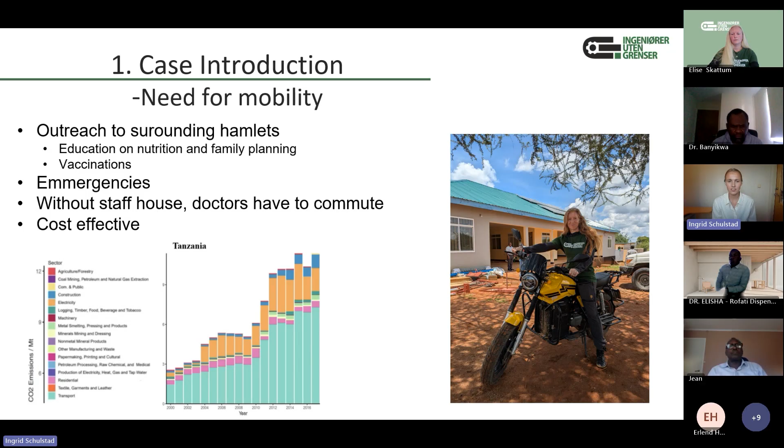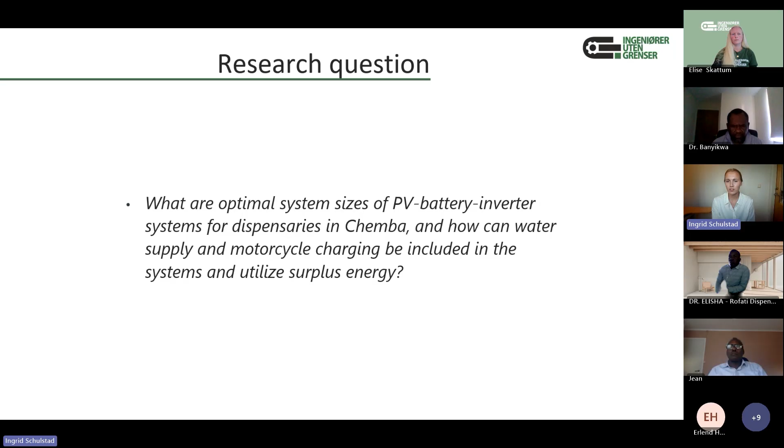So my research question ended up to be: what are optimal system sizes of PV battery inverter systems for dispensaries in Chemba, and how can water supply and motorcycle charging be included in the systems and utilize surplus energy?

Bear with me, this is the overview of my method, and I'll take you through the fieldwork, followed by the load profiles. I made 3 load profiles based on the fieldwork, all made up of critical load, normal dispensary load, scenario-specific load, and dispensary motorcycle load.

I've also modeled the PV generation at the site. These 3 load profiles are included in a MILP, mixed integer linear programming optimization model, to find what are the optimal system sizes, how many PV modules and how many batteries you should have.

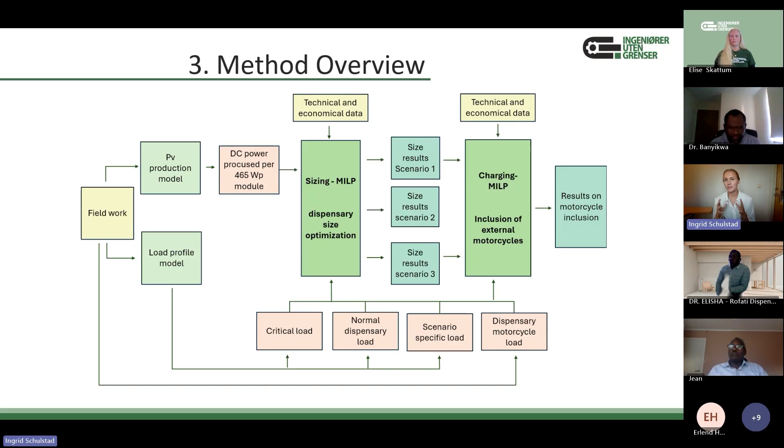After the sizes are found, I made a new model for charging optimization, where I investigated how external motorcycles or village motorcycles can utilize the surplus energy in the already optimized system sizes, and in that way, how the dispensary can act as a rural charging station.

So first, the fieldwork. We started in Dar es Salaam, where we met Eliko at their office and spent some time with them and got to know them. We also spent 2 days at the University of Dar es Salaam.

We did interviews with doctors and nurses at 5 different dispensaries and 1 health center, and with the district medical officer, who is responsible for all the dispensaries and health centers in Chemba district.

So this was very valuable for hands-on and local information about the local needs.

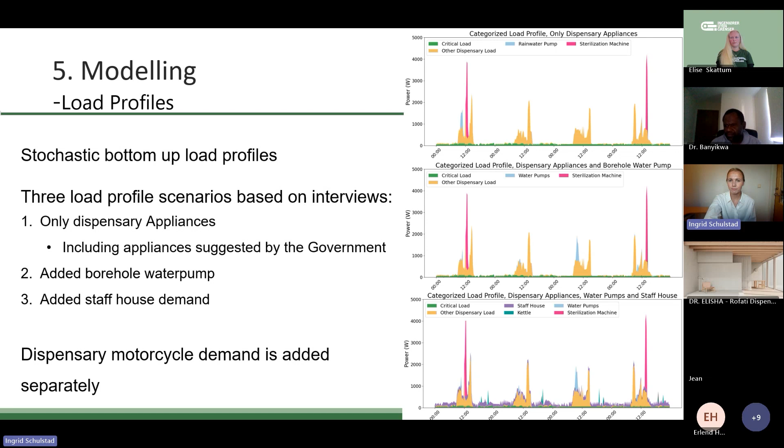And the motorcycle, the dispensary motorcycle demand, is added separately to these load profiles, and they're represented here.

Here you can see this upper picture is a representation of the case where the doctor commutes back and forth to the job every day, and here there's a meeting and outreach for these small areas only. And this is the case where the doctor does not commute.

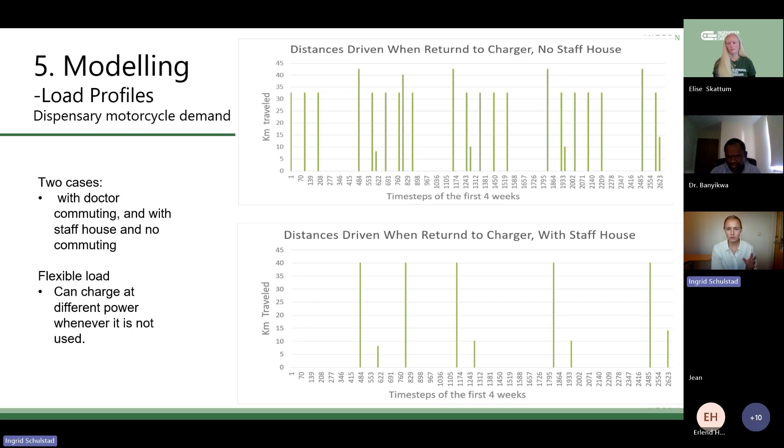This load is a flexible load, which is very preferable because you can charge it at any time as long as the motorcycle is not in use, and you can also charge it at different power. So I've used these two different cases in my thesis and also sub-scenarios of the different loads to look at when you should use the different appliances and so on, but I've not presented that here.

This is the representation of the power generation. I used pvlib, which is a Python library, to model it. And I used typical meteorological year data, GPS location, tilt and orientation, and I found soiling ratio data from literature. Temperature and wind are also included in the typical meteorological year data.

What you see here, I'll not go deep into this, but what you see here is the solar irradiation per square meter, the blue. The red is solar power generated per PV panel, so about per 2 square meters. And this orange is when you include the effect of soiling.

So here I've included soiling, so more and more sand and stuff like that adds on to the solar panels. And in July here, I've said you have to manually clean your panels, and then the production goes up again. And in the end of the year, I have added cleaning based on precipitation patterns.

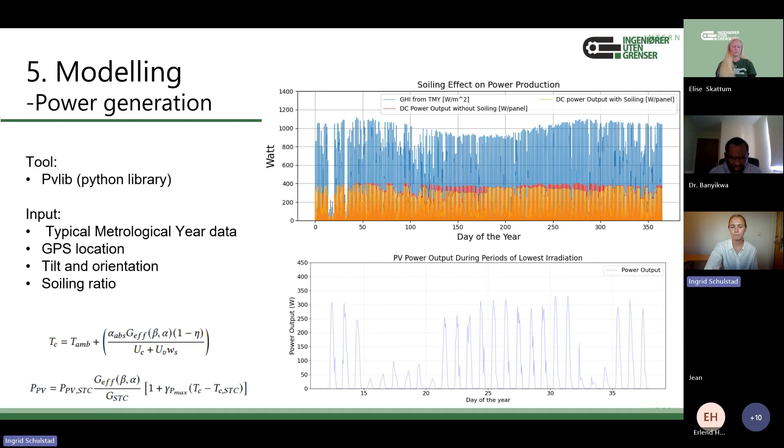So now I've presented fieldwork, load profile, and power generation, and I'll go over to the system sizing. What I want with the system size optimization is to meet the demand at the minimum cost. This is a picture, just a visualization of the model where we're looking at 5 different days with low irradiance.

The yellow here is power produced by the PV panels. The black line is the dispensary demand. The blue is dispensary motorcycle demand with a commuting doctor. And yeah, this is the charging. I don't know why it's spread out, that's in the other model.

The brown line is the potential from the PV panels, but it's limited by the inverter. So the inverter size is also optimized, and it's optimized to be here, which is effective if you want the morning to be steep and the evening to be steep, or if you want to maximize the power during days with low irradiance. So it's nice to have more PV panels than the inverter can actually convert.

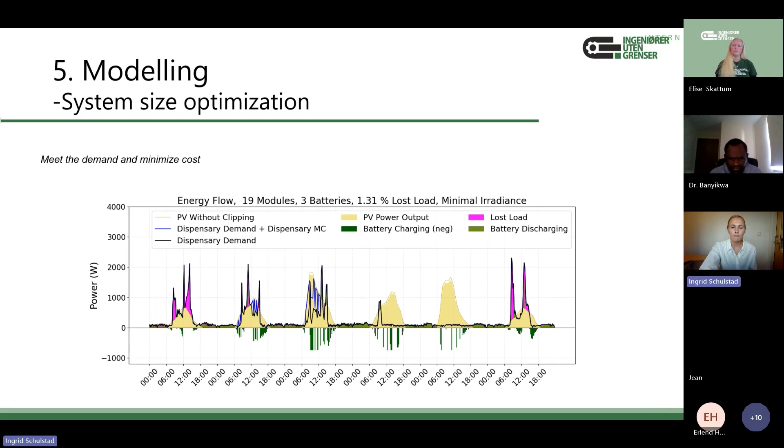So of course, it's very interesting to know how much more does it cost to always cover all the demand. And that is why I did this analysis, to see how much of the total annual demand is allowed to not be met with loss of load, loss of power supply probability.

So therefore, it's common in literature and in praxis to find a value of loss of power supply probability that you do allow. And what I found here is that by reducing the reliability and allowing 1.5% lost load, you could reduce the price by 25%.

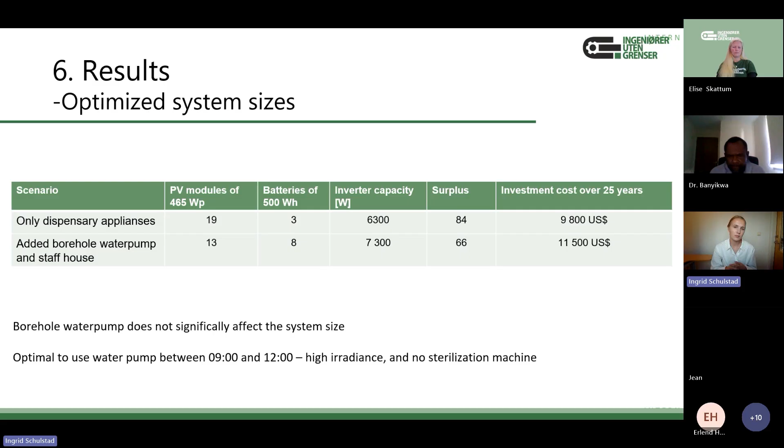So over to the charging optimization. This is more or less the same picture, but with another model. Here, the system is 13 modules and 8 batteries.

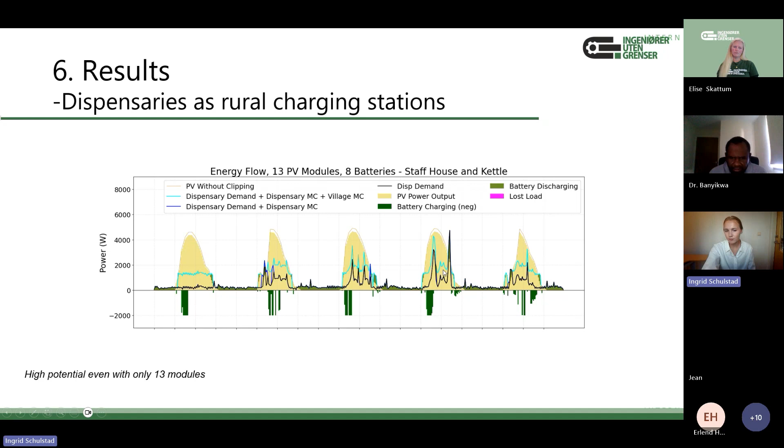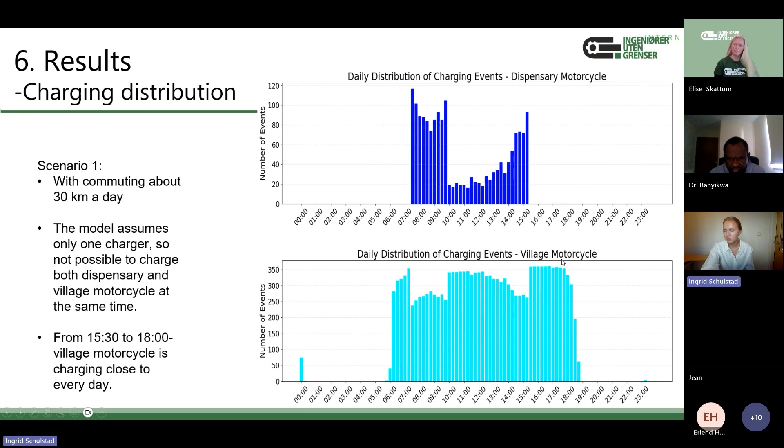You can come with your motorcycle and probably charge with maximum charging power, at least if there is communication between the dispensary and the villagers, so that the dispensary says, yeah, you can come and charge at this time of the day.

So in that way, surplus energy from the cost-optimized dispensary systems can be utilized as rural charging stations. This is very important for the transition towards electric mobility, as Tanzania also needs charging stations and charging infrastructure. And it's important in order to promote people in rural areas to buy electric motorcycles. So in this way, this creates rural charging stations without additional cost or CO2 footprint if you do it in combination with the dispensaries.

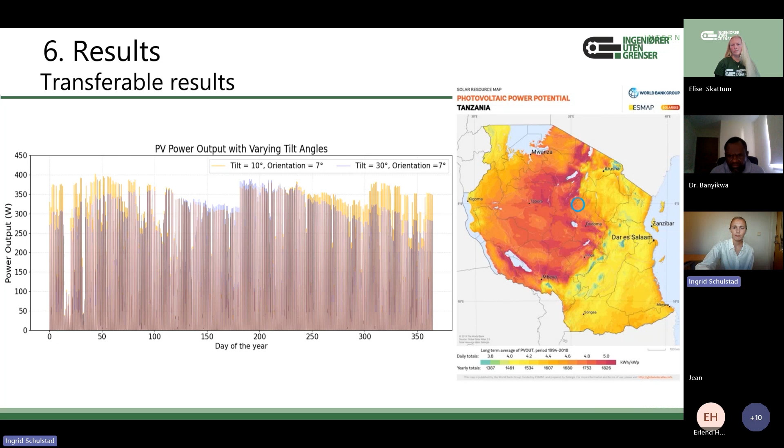And very short, I'll also just present the case of Masiwa, which is a dispensary that we visited. They have to travel 8 kilometers to fetch water and bring it back to the dispensary. But they do have a well which is closer, but it doesn't have power, so therefore it's not operating. And when we were there, we took water samples from this non-operating, malfunctioning well.

And also we took water samples from the roof-collected water in order to figure out the quality of the water, because groundwater contamination, especially nitrate and fluoride, is an issue in the whole of Tanzania and many other countries. And what we figured out, with great help from Dr. Banyikwa and the chemistry department at the University of Dodoma, is that the water in this malfunctioning well is actually of drinking quality within the Tanzanian and World Health Organization standards.

So therefore, we really hope that we can find a solution to power this well and make life easier for the guys in Masiwa.

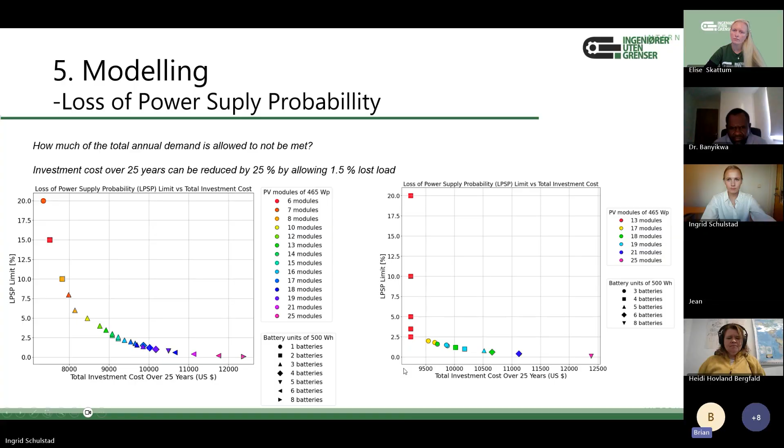Yes, you can hear me? Okay. I was hoping Dr. Alicia could come on, but it doesn't seem to be possible. But one final comment. If I was surprised at your 1.5%, it would be that it's so low. Many of these clinics will have a small diesel generator for such emergency conditions, will they not? Or if not, it might be worth buying one.

Yeah, that could be. I've not studied that solution. Then I'd rather just have a bigger battery because the critical demand is so low. But yes, it's more common to have a higher loss of load probability percentage. You can also have a diesel generator, but the cost of that is probably higher than having more batteries, I would assume. But of course, you can't just rely on batteries if you have a long period without sun.

Yeah. The human aspect, because when there's no solar energy, there's a full understanding in the village that rationing of power is necessary. So any other load would be taken off, I would have thought. So maybe a tendency to a higher loss of load probability would bring the cost down, and that's what we need to actually magnify this throughout the region, bringing the cost down.